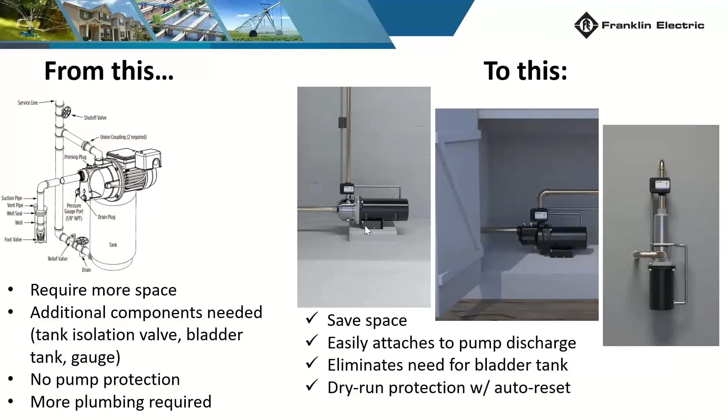Then I'm going to transition a little bit to the combo products, what we call a combo, which means an inline control along with a choice of centrifugal pumps, surface pumps. And then at the end, if we have enough time, I also want to bring up a couple of other alternatives when it comes to residential or light commercial boosting applications.

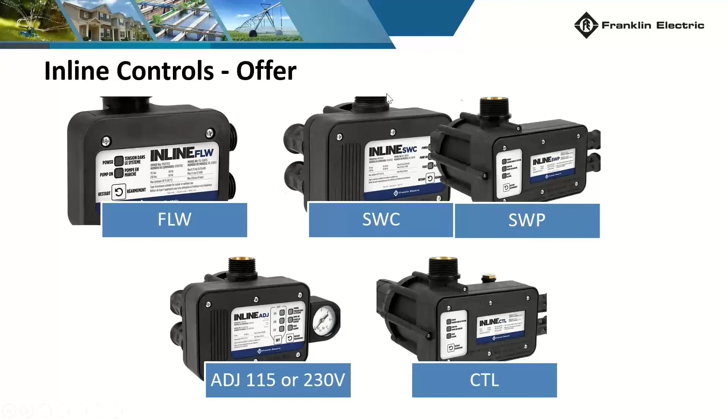So we're talking about systems that typically go into a residential setting where we're getting our water source and trying to replace a traditional system with a differential pressure switch. There are solutions today and have been for years that will accommodate these applications and at the same time provide a little bit more space savings when it comes to certain sites. It will also help with pump protection, and it will also reduce the number of components that we're needing to add to that pump.

If I wanted to put inline controls into a map of alternatives, this will be more of a solution that is kind of in the middle of the road between a conventional pump with a pressure switch and a bladder tank, and a VFD that provides constant pressure. The inline controls use a microprocessor, and then signals depending on the model, but most of them use both a flow signal and a pressure signal to decide when to start the pump, when to stop the pump, and when we have a potential issue with the water source, which could be causing the pump to run dry, or to say we're cycling, or we haven't started this pump in a long time. Why don't we give it a spin so we prevent it from locking up from debris or just the components of the pump getting stuck.

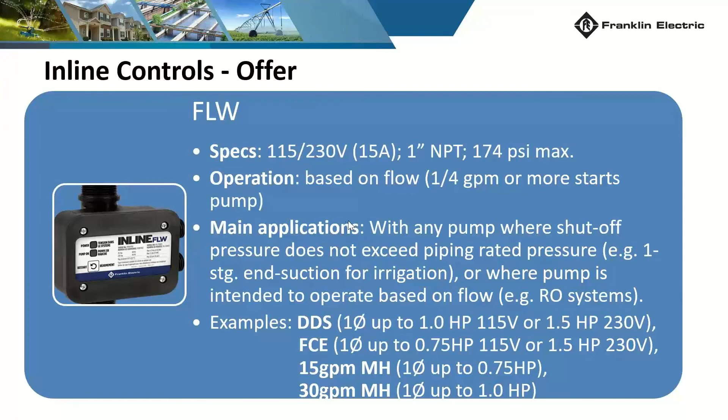So you can see here some examples of the controls that we carry, and you can tell, at around 151 list price, it's considerably less than a VFD, but it is not that much more than what you will spend on a traditional system.

And then there are some other benefits or savings that you will see when it comes to most of the applications. So what we're talking about is going from an installation that will definitely require more space. In many cases, it will require adding components like isolation valves for the bladder tank. In some of our controls, we have an integrated gauge, so you wouldn't have to plumb that additionally. And then, obviously, simpler plumbing overall.

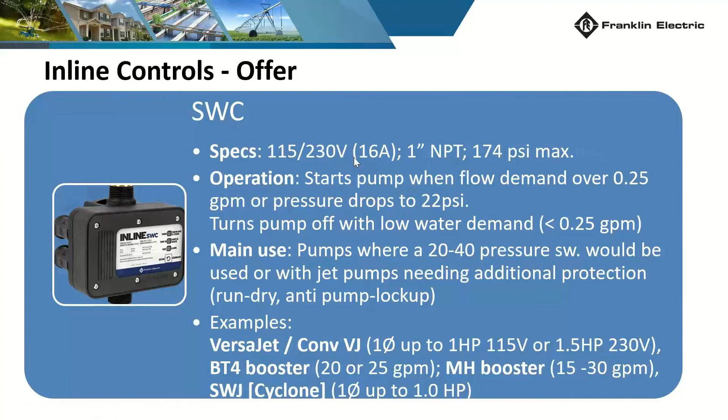So we have certain examples, and you can see the pump to the very right is a pump that could easily be used on a car washing application where you want to boost the water, but you really just want to immediately start the pump based on the flow. So as soon as you get that demand, you're using a simple flow control to get the pump going.

Or in some instances, we've seen these pumps with the flow control used on RO systems, and kind of going in the same direction of not being that concerned with the pressure, because the pressure varies as the filters get clogged or go through their life. But you want to make sure that you always keep that pump running as soon as there's any water demand. And I'll explain the differences on the different controls.

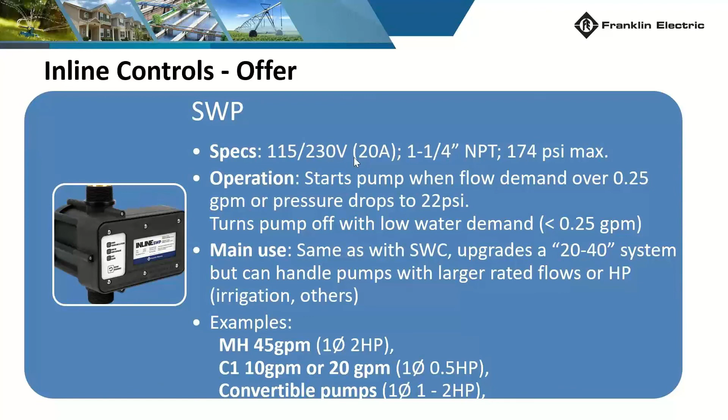There are 5 different models, but in reality, three different functionalities. So I'll go through those.

Before I go into detail, I do want to lay out what is the offer. Like I said before, we have 5 different models, but I can put these 5 models into 3 buckets.

The first one being the FLW, which is entirely flow-based control. As soon as there's water demand, the pump will kick on.

It will have all the same protections as the other controls, but it will be a purely flow-based operation. Now, the SWC, SWP, and the adjustable, those are the controls that combine the flow demand and a pressure setting. In other words, if I had an application where there's not a definite flow demand, but maybe the pressure or the water starts being used to a point where the pressure drops, these controls will also have a low pressure threshold, similar to a conventional pressure switch, where it will tell the pump, hey, we need to start. We're getting a very low flow demand, but the pressure has dropped to this point where we need to kick on to prevent the pressure from dropping further.

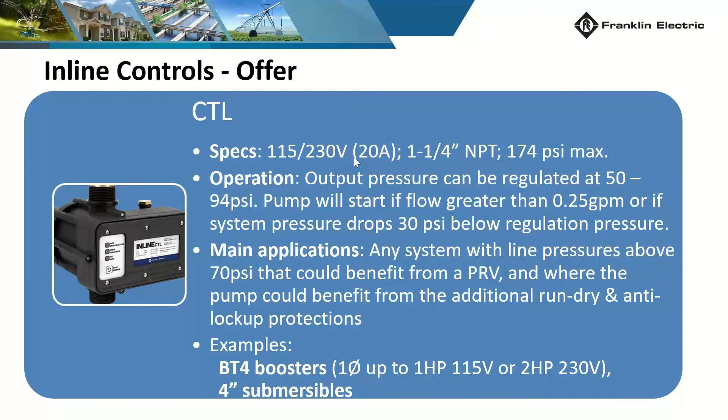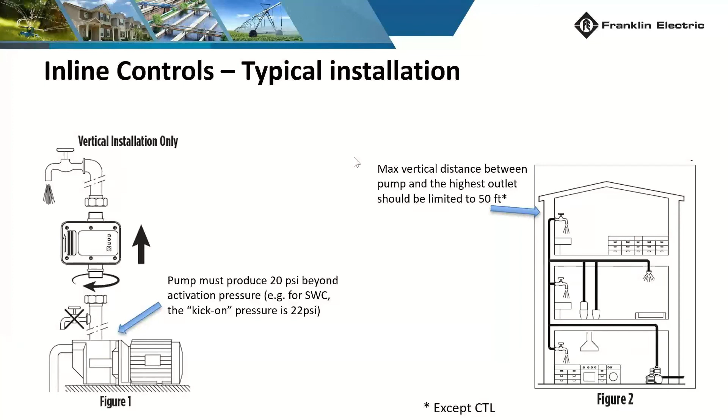Going a little bit more into the specs of each model, the FLW, our flow-based control, will start the pump at a quarter gallon per minute or more. This is what you will typically see on booster applications, BT4s, MH pumps, typically whenever you want to control based on flow, like those RO systems I mentioned before, and wash-down applications.

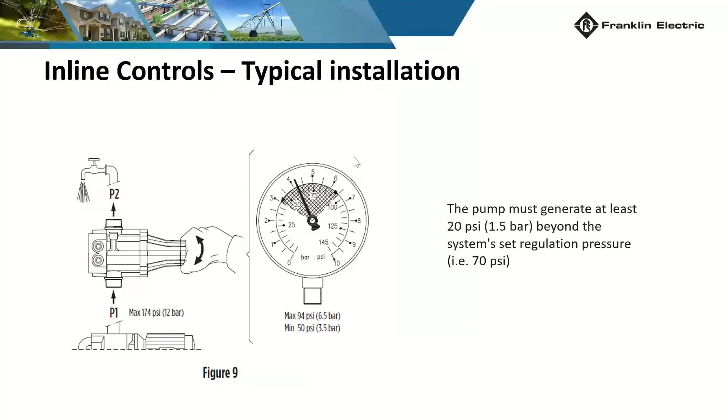You're right, 2 years ago was probably the best winter I had out here. I've been out here for just about 7 years, and my first winter was hard to say if it was good or bad, because I was just blown away by everything out here, man. I'd been skiing on the East Coast, so I just lost my mind that first winter. But yeah, 2 years ago that winter was dope, and hopefully we have another good one. Last winter sucked. Where are you from originally? Virginia? Virginia, yes sir. What brought you out here?

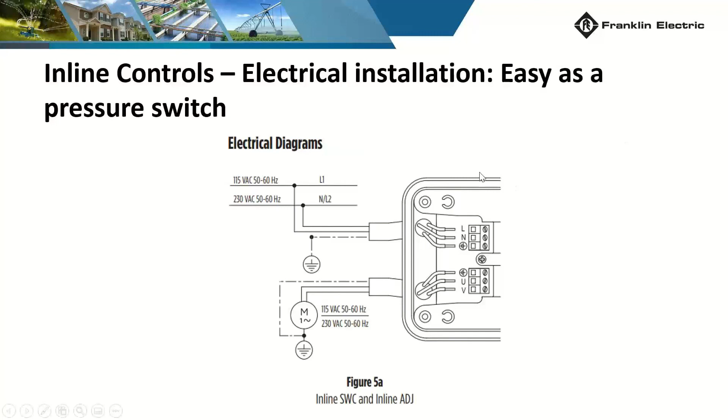Okay, so the SWC, going back to the previous comment, on this one, another benefit, similar to the FLW, is we have the flow control but also the pressure setting. I also want to mention most of these controls will operate on both 115 and 230 volts. In this particular case, the SWC is one of the controls that probably applies to most of the surface pumps that I see out there, just because of the pressure set points they come preset at.

In this case, the SWC will basically replace a 20/40 pressure switch, where you'd use it to say, hey, if the pressure drops to 22 psi, or the water demand is more than a quarter gallon per minute, we need to get this pump going and get ahead of the game on the pump curve, making sure they see as little change in the pressure at the point of use as possible.

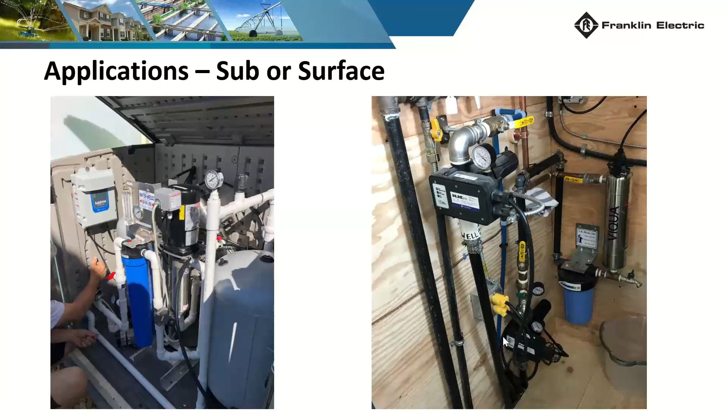It will also have a different maximum amp rating, so you have a maximum of 20 amps. At 20 amps and 230 volts, you're easily talking about a 2 horsepower pump or even a 3 horsepower pump. So these two go side by side - they have distinct functionalities, just depending on how much water you're planning to move or how big that pump is. One might be more convenient than the other.

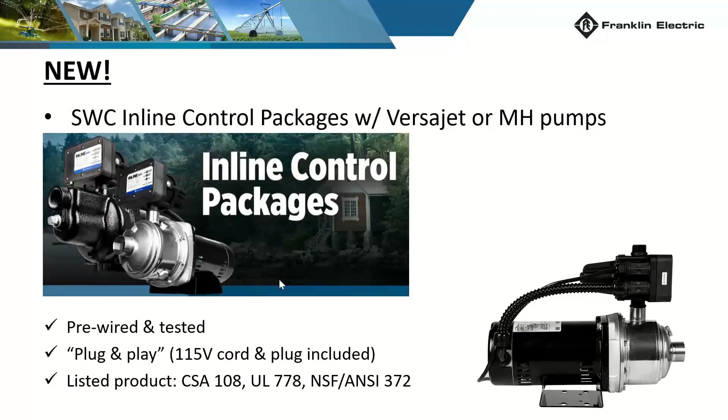On the adjustable, this works very similar to the SWC. They have a threshold of 1/4 gallon per minute to kick the pump on. But the main difference is that with the adjustable, you have a very simple set button on the front of the control to adjust what you want this kick-on pressure to be set at. So it can be selected to be 22, 29, or 36 psi.

In any case, regardless of what your kick-on pressure is, we're expecting the pump to make at least 20 psi above that threshold or kick-on pressure, to make sure that the system operates and starts and stops consistently, just like you would see in any other standard system with a bladder tank and a pressure switch.

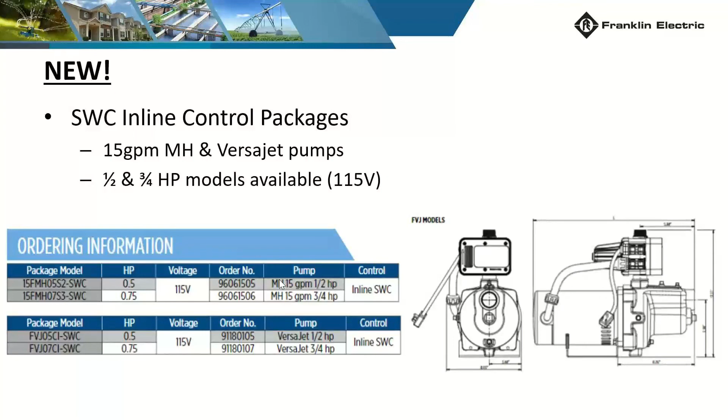And then finally, the CTL. Like I mentioned before, the CTL is a little bit different from the rest in that this is really to hold and control when you have excessive pressure. This is particularly seen when you have a submersible application, which, by the way, all of the other controls can also be used with submersible pumps.

But in this case, the CTL really comes in handy when you might have a low static level on your well, and that static level is dropping once the pump is running. That means you will have a lot of pressure from the get-go when you're starting the pump, and that pressure is going to go down as the level drops on the well.

So this CTL really helps in that it controls or contains that pressure to an adjustable pressure setting. You can decide anywhere from 50 to 94 psi what pressure you want on the outlet of the control. Again, it can be used for surface pumps, but for the most part, we see this going with submersibles.

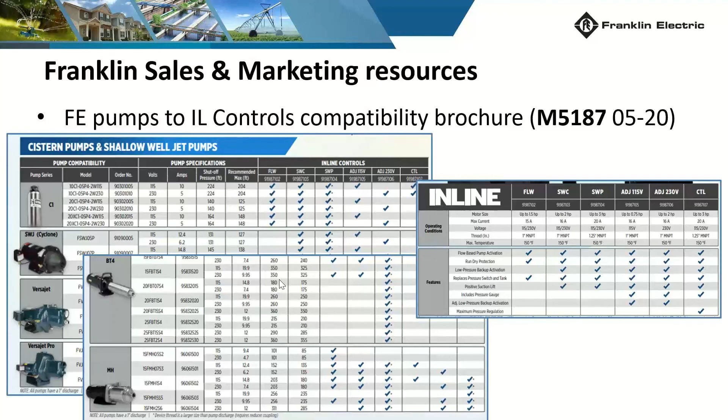The typical installation is really easy with these controls. One of the things you've probably noticed already is that we recommend, for the most part, that you don't even have a bladder tank with these systems. The reason being, the control will act as that protection to avoid excessive cycling of the pump, and it will also get ahead of the game instead of waiting for the water to be completely depleted.

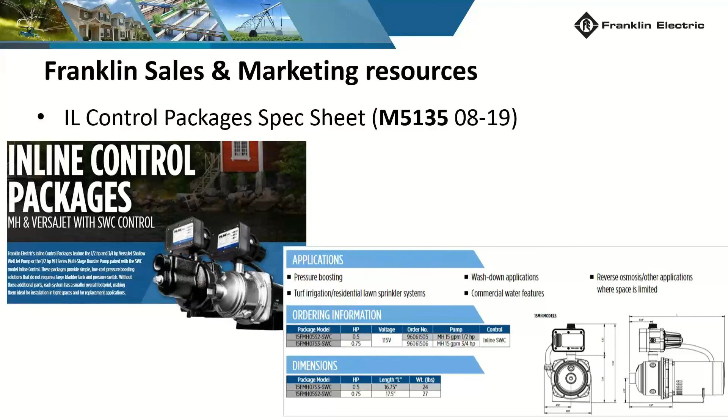So it will get ahead of the game by maintaining a pseudo constant pressure. The pump will keep running at full speed, but we're definitely knowing in advance when the pump might need to start when you have a water demand.

One thing to keep in mind, and this is maybe one of the only requirements, but I don't think you'll see any issues with this, is that the pump, whatever pump you decide to put with the controls, must generate at least 20 psi above the system set regulation pressure. So in other words, if you want the pump with an SWC to kick on at 22 psi, you want to make sure that pump can make 42 psi, which, in most cases, will hold true.

The electrical installation is also pretty easy. You basically have your 115 or 230 volt power coming into the control, and the control will act as that starting relay to kick on the motor as needed.

These are some typical applications. Here I'm showing two sides. The one on the left is an RO system, and you'll notice they have a SubDrive Utility there, one of our VFDs as well.

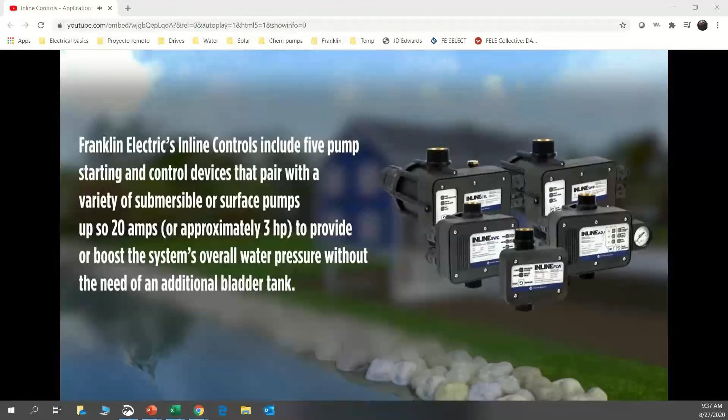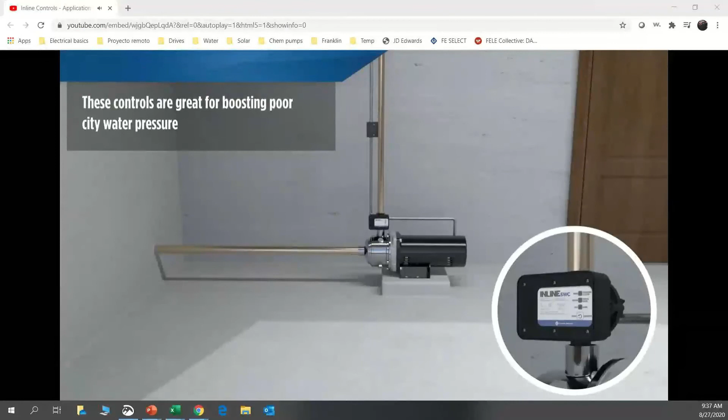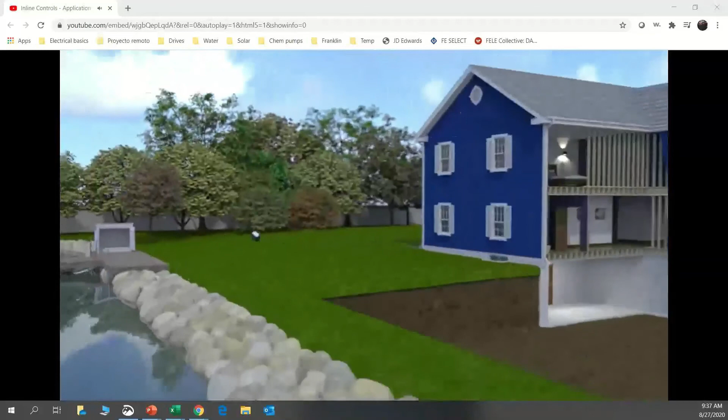On this RO system, basically they had a series of pumps providing water from a well, and then once it gets into the RO system, it goes through another set of pumps. So what was interesting about this site is that not only did they have a VFD to regulate the pressure, they also had one of the controls to operate one of the pumps that they had internally in this RO system.

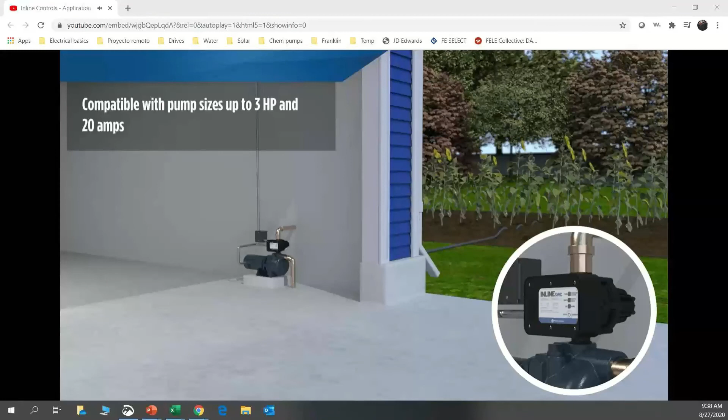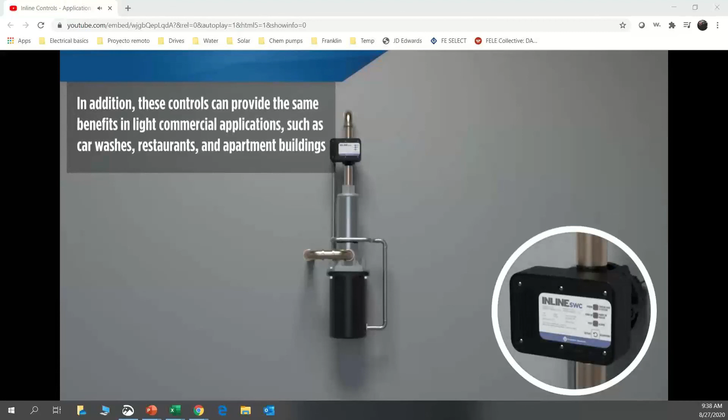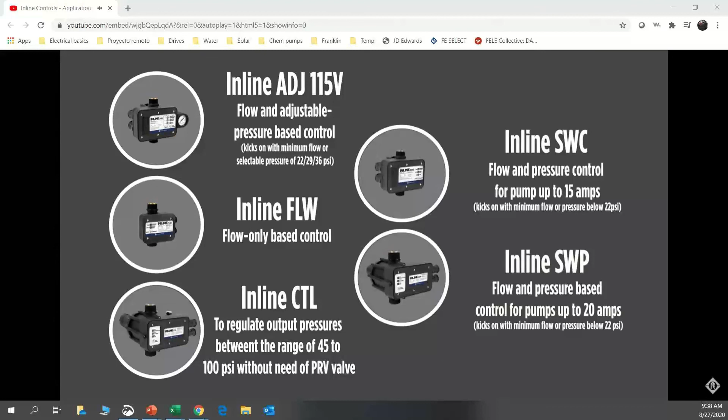In this case, the same. They were even using the same control, but two different pumps. It talks about the versatility of these controls.

We have seen from some markets the need of having these controls built into the pumps and have them as a single unit. So we launched this year what we call a control package, which is an SWC control with a choice of MH pumps and VersaJet pumps that I think Derek had one of them there at the office. We have 4 different models.

All of these are on a 115 volt plug. Technically, if you wanted to run it at 230, you could still do that if you wanted to. But we have gone through the testing and the UL approvals to have that 115 volt plug.

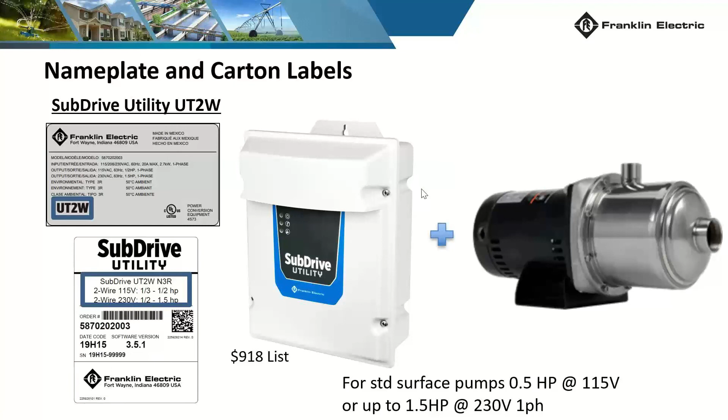So on small applications, in this case up to 2-3 horsepower, I think that the controls are going to come really handy for making the case to the customer that they can definitely upsell to these if that homeowner wants to have a little bit more protection without going all the way into providing a VFD or some other electronic protection.

So with that being said, I wanted to show a couple more slides that are not directly related to our inline controls, but they are some alternatives to boosting applications.

Hey Philly, we have one question here in our room.

Sure, so with the 3/4 horse VersaJet with the SWC, it works in a pressure boosting application, correct? So if we have, say, 35 psi incoming low city water pressure, and we want to boost the pressure to 60, 65 pounds, what can I expect this pump to do at, say, 10 gallons a minute versus our shutoff pressure?

That is correct. So if you have a certain incoming pressure, you'll simply add that to what you see on the curve of the standard VersaJet. If you look at the curve, it's not going to be any different from that, at least not at shutoff.

Now keep in mind, if we're talking about the SWC control, you're looking at that 22 psi setting. It will only kick on if your pressure at the surface drops to 22 psi or less, or if it detects a water demand of more than 1/4 gallon per minute. So even if the pressure was higher, but you detect you're moving water at a higher rate, you will see the pump kick on. Okay, and that's what I would expect to see.

Say with a varying inlet pressure, sometimes it's at 50 or 55 psi. So in that case, we've got 55 pounds coming in when no one else in the subdivision is using water, so the pressure is a little higher. So the pump kicks on based on demand, because there's a demand of more than 1/4 gallon a minute.

Is the pump going to shut off at a pressure that exceeds the recommended pressure for the plumbing? Say we get up around 80 pounds, is that possible? It is possible, because it's looking at one or the other, not both at the same time. So it's saying, okay, I'm being told to run based on flow, so I'm going to kick it on.

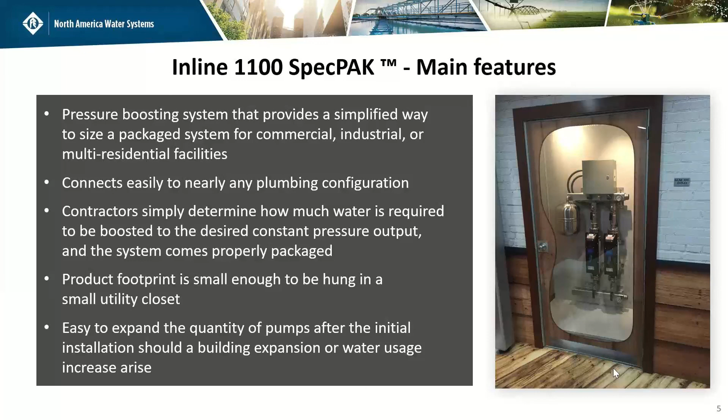If you see an application with too much variance, but you have at least 50 psi coming in—we see this in places where the pump might not be next to the home, maybe it's closer to the lot, and the house is a few yards down or uphill—you really want a certain pressure there. You usually want 70 psi or 60 psi, because up at the house you'll only see like 40 or 50. If that's the case, and you see too much variance in that incoming pressure, your best alternative might be a CTL, because the CTL will regulate the pressure. It will say, oh, I have too much pressure—but that CTL needs at least 50 psi incoming.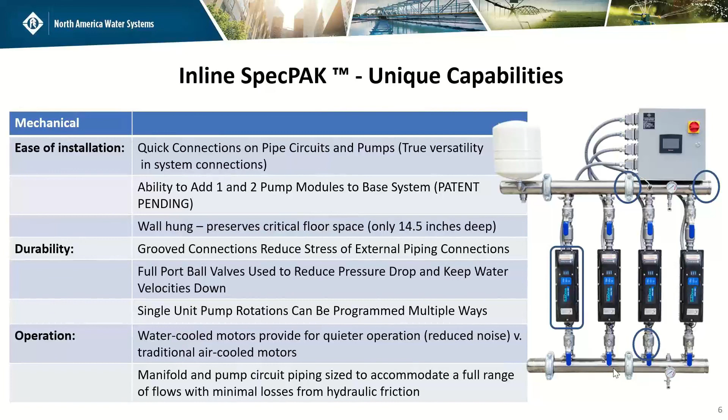Right, so what about the ADG? I think it was the ADG model or ADJ model. The adjustable one—you can decide where to set your kick-on pressure. But again, the pump will keep running as long as you have water demand.

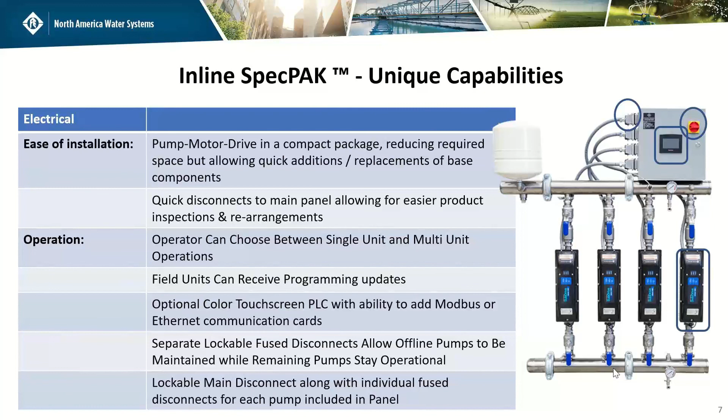Okay, so it doesn't do anything on the shutoff side, just the turn-on side. Correct. Yes. Okay, so one other question—the MH series pump is not self-priming, correct? Correct.

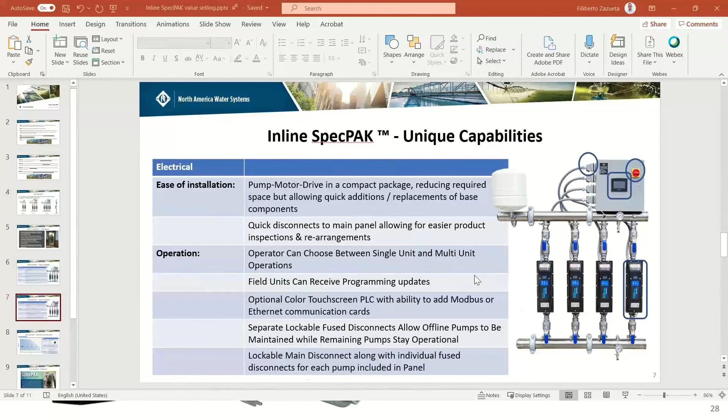So are you familiar with the Grundfos Scala or the MQ? Yes. So the MQ operates a lot like the SWC, I think—would you agree, as far as flow, control, and shutoff? Yes, it does too. You're talking about the MQ or the Scala?

Well, the MQ is based on flow primarily. There's no pressure adjustment. With the Scala 2, you have a pressure setting—you can tell the pump to shut off at a certain pressure or maintain a certain pressure, basically.

Yes, now keep in mind the Scala, I believe it's a VFD, so the price point will be considerably different. The what did you say? The price point. Yeah, right, yep.

And that's why I wanted to add these couple of slides at the end. We do have the SubDrive utility, which could serve that purpose if you want more of a constant pressure. But you're not talking about a $150 list on a control, you're talking about $900, which is still pretty competitive to any drive you'll see out there.

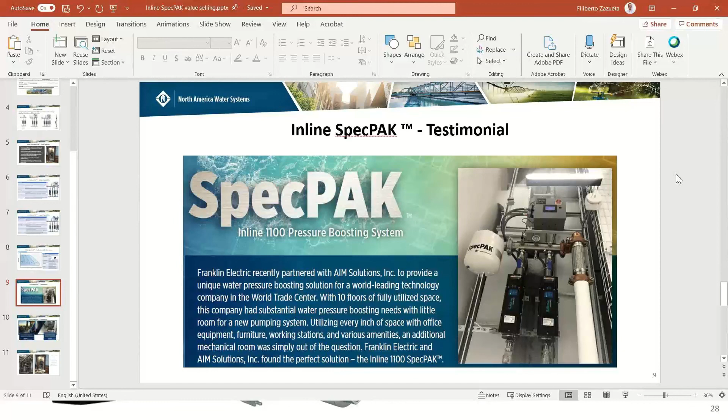In reality, what we want to provide here is a menu. We want to provide the appetizers, the salad, but also the steak.

I don't know if there are any questions. We still have a little bit of time, and if there are none, I want to share one more thing here real quick. Hoping that you can still see my screen. What I'm showing here is the Inline SpecPAK.

This is more on the commercial side. What you will see in clinics or restaurants, small hotels, that sort of applications.

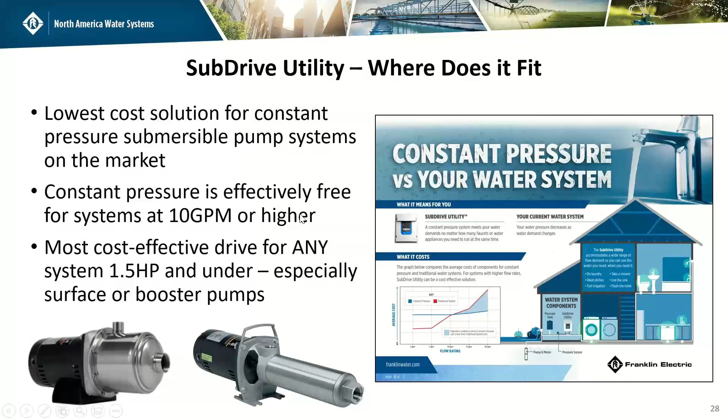Can you use this on anybody's pump? The thing I noticed that won't work on that pump is the discharge size, 1.25 inches versus 1 inch. I'm sure you could put a bell reducer on there and make it work, but you guys don't offer that pump with this controller in a box, already wired, correct?

No, the only current option is the SHC complete with the first gen of that. But, like I said, you can take that and put it on any of our pumps.

Yeah, this would be great for irrigation, for a lawn sprinkler pump. So on the submersible, you would just tie the power into it before it goes down, just run it through here, like this, and then down to the pump, and you wouldn't need a bladder tank or a pressure switch.

That's right, Philly? All that would be incorporated in the switch, correct, whether we're using the CTL or... Yes, so if you want to think about it, it will be like having your pressure switch, but it's going to go on the main line.

So how do you get your runtime out of a submersible with this control on it? I'm sorry, I was hearing something. If you have the CTL on a submersible application, the pump is still running full speed. How do you get your runtime out of your submersible pump for the cooling?

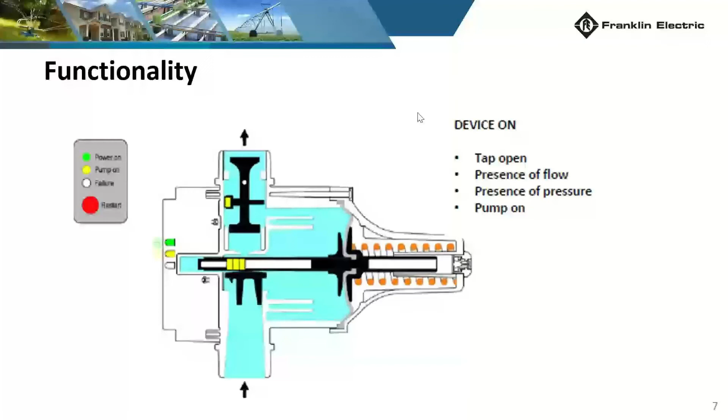Thank you. Yeah, the reason for my question was we have put a few in and have not had issues, but that question and concern, of course, has come up. Okay. Thank you, Philly, great question. Thanks.